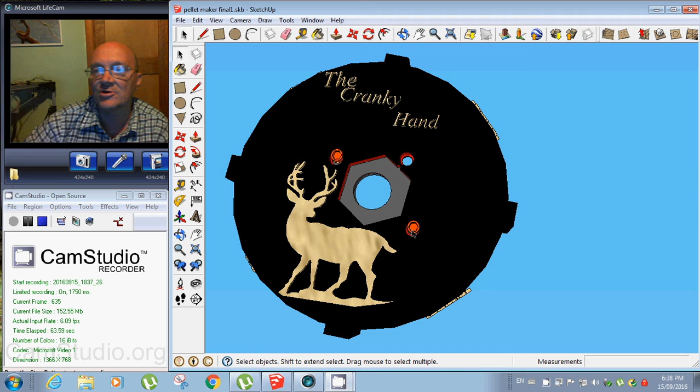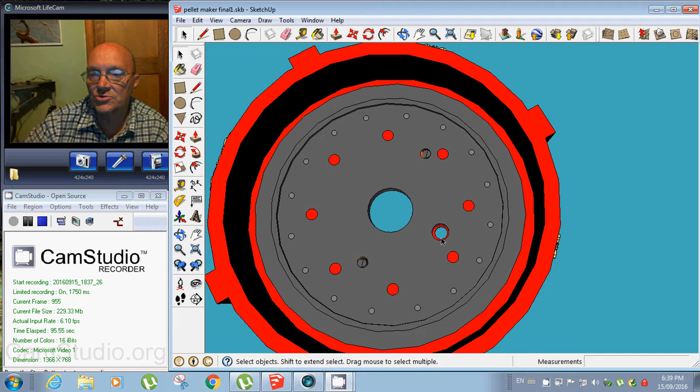I'm now going to spin this around to the fill plate, and I'm going to talk about this big hole here. That's the one where the main hex nut goes through, the big one, the long one, and that holds everything together, but it also makes everything aligned. So when you remove the lid, you can keep everything aligned using that hex nut and that main hole, so that when you start the process up, everything's aligned.

Now the other thing is, you'll see these are the fill holes. Everything has to be aligned in order for you to fill the molds properly, otherwise it isn't going to work.

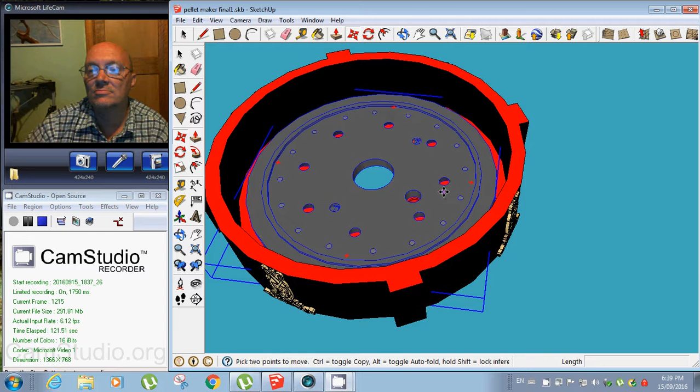The next thing is these here. I'm going to move the fill plate over now. It's going to take me a moment here to do it. I moved that side. Okay, so as you can see, these are all part of the lid.

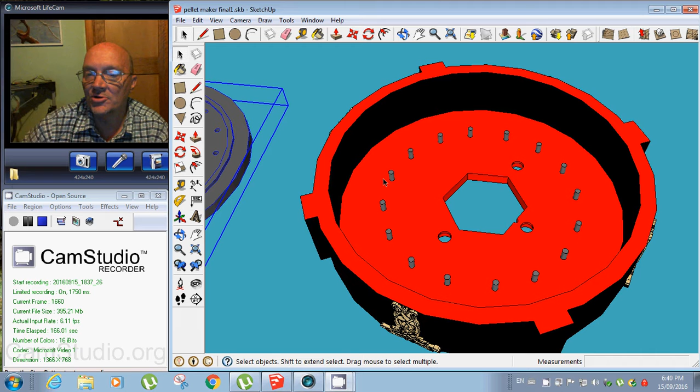When you cast your metal into the molds through the fill plate, and after you swage the pellets, you have to turn everything else upside down, and the bolt will be attached. Then you remove the bolt, but drop everything upside down, the lid flat on the surface, and these will push everything up off the base plate, so that the base plate will go 1/4 of an inch up based upon these, and will allow you to attach.

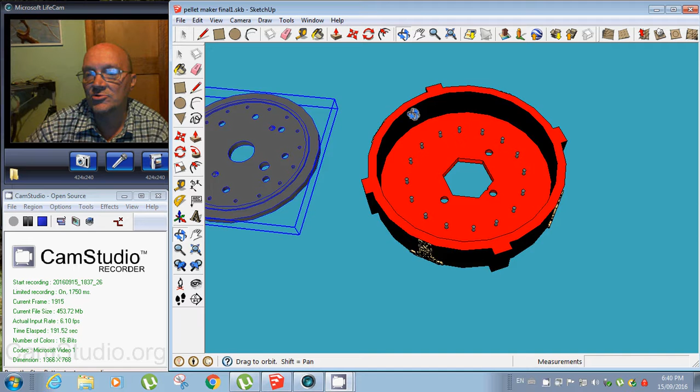And I'm going to spin this around again. You go in and you reattach these, which aren't attached at that time, to the lid and the fill plate, and basically it secures the lid to the fill plate, and then you give the fill plate a turn, like a crank, and it'll break off the lead from the pellets, the excess lead, once you finish swaging, after you finish casting and swaging. So that's afterwards.